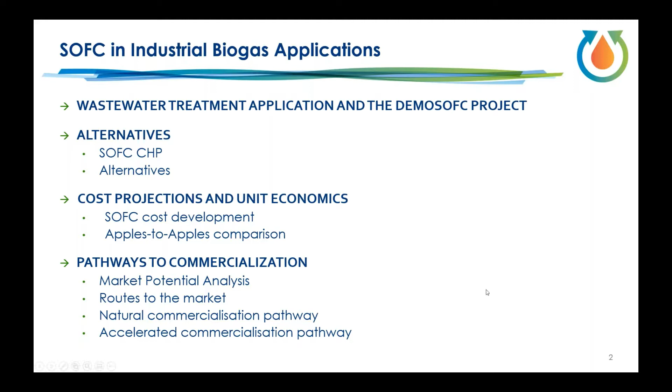Okay, a little bit of repetition. Some of you have been in these webinars earlier, some of you haven't. At the very heart of the DEMOSOFC project is the idea of energy autonomous or partly autonomous wastewater treatment, and how solid oxide fuel cell technology plays a role in this concept. Well, wastewater treatment first of all is a very universal application. It's surprisingly similar in every city. The basic processes are similar. There are some choices you can make, but the biggest difference is usually scale.

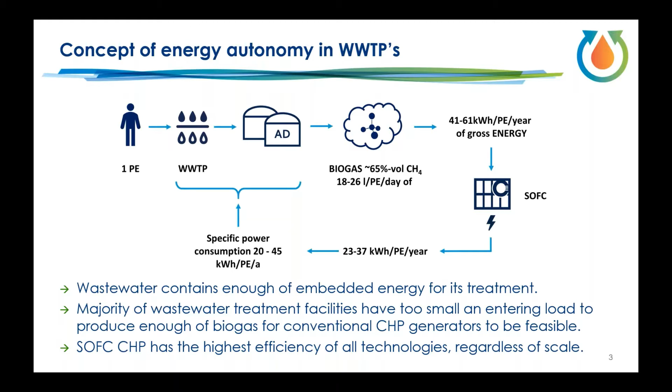Curiously, wastewater contains enough embedded energy for its own treatment. It's a fairly significant municipal energy consumer as of today, but it has potential of being energy neutral or even a net producer. The majority of wastewater treatment facilities are quite small, serving smallish communities, and therefore the entering load for biogas production is not sufficient to make power and heat production with conventional technology feasible, and therefore penetration of these technologies is quite low in small and medium scale. Solid oxide fuel cell technology has the highest efficiency of all technologies, regardless of scale, and therefore it has some interesting promise to this along with many other applications.

So this is, in very rough terms, the concept of DEMOSOFC. We have an existing medium-sized wastewater treatment facility with an entering load of approximately 180,000 population equivalent. There is an anaerobic digestion process that produces biogas out of the sewage sludge, and out of that gas we can produce electricity by solid oxide fuel cells. The facility also has a boiler that can supplement the thermal needs by burning either biogas or natural gas.

In a full embodiment of the concept, this fuel cell installation would have produced 174 kilowatt electrical power behind the meter. It would all be consumed by the facility and cover basically 100% of the normal thermal loads. The promise is superior efficiency and an ability to offset power that would otherwise get purchased from the grid. Fairly infrequent maintenance breaks and well-matched heat output with continuous thermal loads required by the digestion process, and on top of that, zero local emissions.

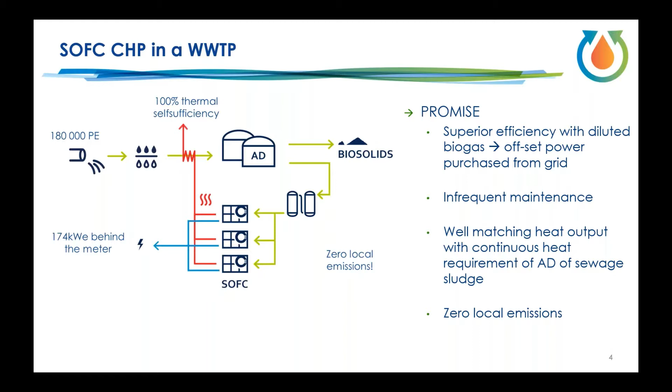If we consider this kind of facility and what can be done with that biogas, it's a medium-sized, approximately 80 normal cubic meters per hour biogas output, but there are annual variations. It's continuous. There's constant demand of power and heat, but variations in those loads around the year and around the day. In this area, energy overall is relatively costly, and particularly electricity, maybe higher than European average. And then, as mentioned, there's a boiler available for producing heat independent from other means of using that gas.

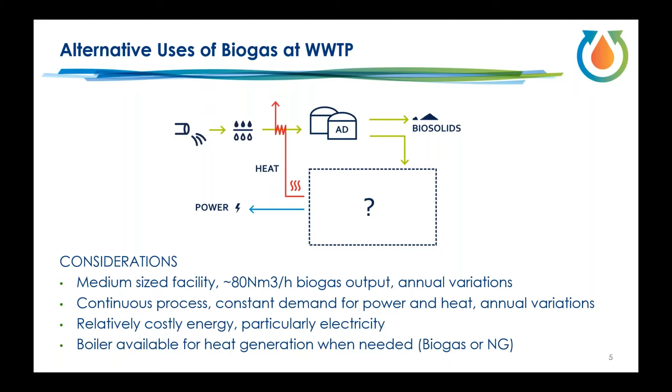The fuel cell installation, as illustrated on top, requires fairly stringent gas cleaning. It provides the highest electrical efficiency and sufficient thermal efficiency, but the investment required is clearly higher, particularly today, and it will remain higher than the engines for quite a while. And this is new technology. It has some concerns, of course, and sort of teething issues. The obvious and quite common solution would be a piston engine, or in some cases a microturbine. Both of them would have a lower electrical efficiency, more frequent maintenance, but this is very well-known technology and can be loaded dynamically.

For this application, it produces more than enough of heat, but electricity would be, out of the same amount of gas, would be lower.

Then an alternative that is not necessarily applicable in this scale is biomethane upgrading. In bigger plants, it's an obvious choice, and it is highly subsidized, a way of producing vehicle fuel. But typically, both the capex and opex make it attractive without particularly generous subsidies in megawatt scales.

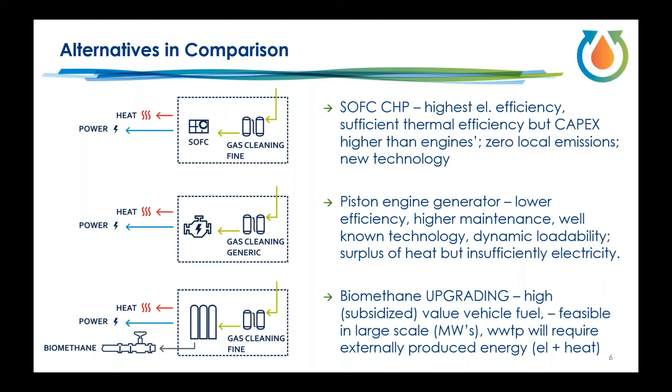Also, the facility itself, the wastewater treatment, which is the sort of primary function, requires both electrical and thermal energy, and then it would no longer be self-sufficient if all this gas would be used for other purposes.

It's a very kind of condensed slide about how to compare different technologies, like apples to apples. An internal combustion engine is the obvious choice. For example, in Germany, you see thousands of smallish biogas engines. There are plenty, and the variety of different sizes is plentiful. Taken from actually a German CHP genset database, I plotted an investment cost here.

Everyone can see that it's dependent on the power output, but it is very low compared to if you know anything about fuel cells. It's still quite low. Also, the efficiency on the right-hand side is dependent on the output.

And sort of intuitively you can already tell that the very low end is the least attractive area, where the relative specific investment cost is highest, and yet the efficiency is lowest, and the specific cost of maintenance also becomes higher at the low end, because it's basically the same cost of maintaining a bigger engine than a smaller one.

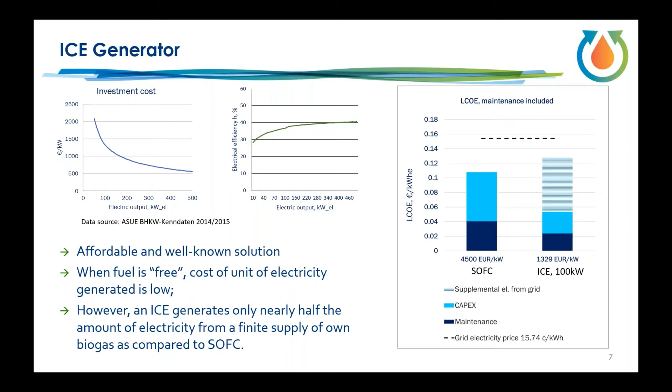Then how do we get to the 4,500 and further? Of course, we clearly foresee cost competitiveness with piston engines, microturbines, and this kind of conventional technologies. Unfortunately, at least for all the competitors sitting in the audience, I cannot share with you our internal stack or system cost data, but instead I wanted to show you data that I collected or put together from public sources.

On the right hand side is the fuel cell stack. In our case, in our power range and with our technology, the entire cost of a system is practically 50-50 fuel cell stacks and then the system. And the stack, therefore, is the costliest item in the system, and it dominates the cost in the future as well, and therefore it's very important.

The data is collected from several sources, actually, from Roland Berger's study. This was like an industry-wide questionnaire or query, where companies operating in this field would share their views of the future, including cost of stack. And I have just normalized it so that every stack cost is normalized per kilowatt net, independent of the system size or stack size.

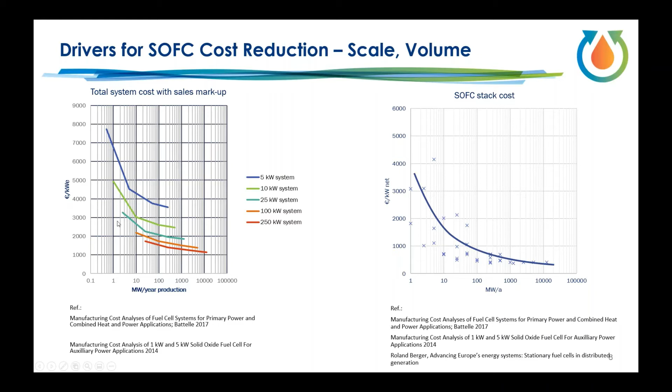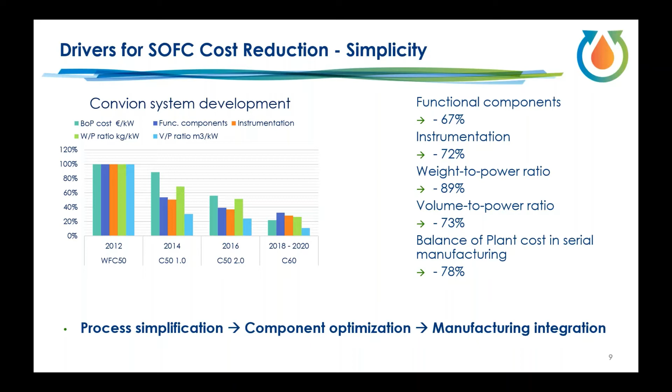I will now switch to Gbemi. She will discuss the pathways to commercialization and particularly look also at biogas and industrial biogas applications.

I think I will have to stop sharing, and I will start sharing. Okay, thanks, Thomas. I hope everyone can see my screen. Not yet. Yes. Do I have permission to share my screen? You have on the account where you are talking, but there are two. If you want, I can also allow the other. It's the other account, please, not the one I'm talking. Okay, yeah, perfect. Thank you. Okay, now you should be able. Yeah. Perfect. We can see the screen now. Okay, perfect. All right, so thanks everyone.

I will just continue, following on from what Thomas just presented. I'll be showing various pathways to commercialize the SOFC in European wastewater treatment plants. It's showing how we can get from today's high capital cost to a point where the SOFC is economically viable, that is cheaper than the business as usual way of providing energy on a plant, or cheaper than its competitor. And we'll see how business models, policies, and the market can take us there.

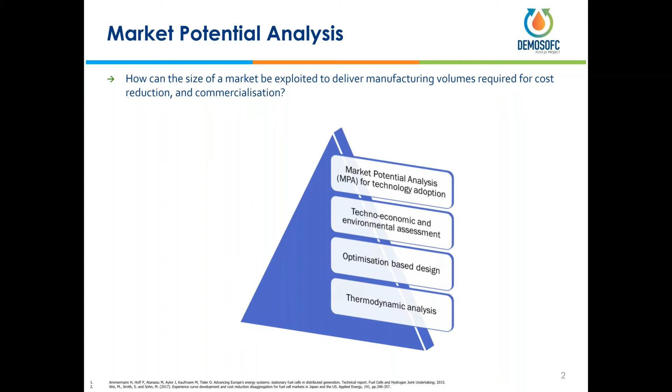For the DEMOSOFC case study, the market we're considering is wastewater treatment plants in Europe, where it's economically viable to install an anaerobic digester. We've identified about 6,000 plants where today you could possibly install the SOFC. Now, each of these plants in each of these member states will occupy a fraction of the market. Now, the market is not limited to this. The market could be a global market, but for DEMOSOFC, we're looking at European wastewater treatment plants.

An optimization-based design of each of these plants shows that the ideal demand for the SOFC is about 13,000 units. So the SOFC is of course not economically viable in any of these plants, but an ideal demand is that. So how can we exploit this ideal demand to bring about cost reduction? As you've seen in Thomas' slides, there is a relationship between increase in manufacturing volumes and the potential to reduce cost. And this is from learning by doing, from improving the manufacturing process. This data again was taken from public sources.

So if today the SOFC cost is about 16,000 euros per kilowatt, the objective of the market potential analysis is to show how we are going to exploit these 6,000 plants and the associated demand to create a manufacturing volume that can trigger cost reduction and sustain it until the point where the SOFC is economically viable. Now, based on this graph, we can come up with different categories of cost, from the very high cost today to the target cost sometime in the future.

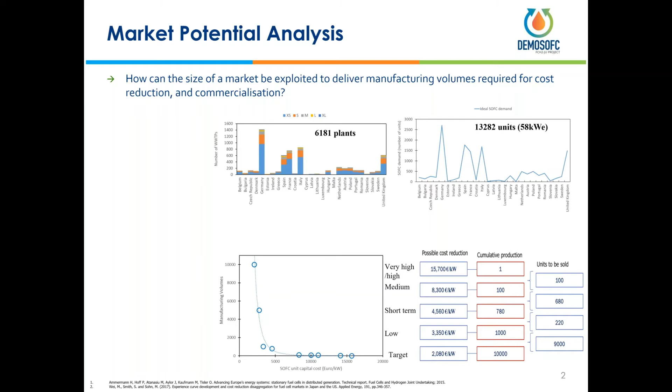So today, for example, if you sell 100 units, then you can get to about 8,300 cost reduction and so on and so forth. So what we see is basically we need to sell 10,000 units to get to the target cost reduction. So how can we exploit this demand of 13,000 units to create pathways to commercialize this technology? The demand is there, but the SOFC is not economically viable in all the plants. Therefore, we need aids or routes to the market.

There are various routes for a technology to get into the market. It could be market-driven, which is purely by energy prices, and for CHP technology, you're looking at the spark spread. A technology could also be driven by policy interventions. So the SOFC has been demonstrated. What we want are demand-pull policies, for example, the feed-in tariff, feed-in premium, tax mechanisms, and quota systems. Most of the plants we've identified in the first slide are eligible for some of these policies. What we want to see is the impact of these policies in commercializing the SOFC.

Another route to the market is business model innovation. This is particularly important for technologies that are cleaner, more efficient, but more expensive. The SOFC being more efficient than its competitor means that there are savings in operating costs every year, as we've seen in the DEMOSOFC plants. So how do we exploit these savings in operating costs to pay for the technology costs? This is changing the way the SOFC is purchased. So instead of paying upfront in year one, is it possible to spread the cost for the lifetime of the technology? And how does this increase its market share?

The next aspect is on incentivizing business models. Now, the common practice is to have policy interventions for technologies. So in the case of the FIT, the feed-in tariff, a price is given for electricity generated from clean energy vectors like biogas. What if we have policy interventions to encourage business model innovation? So for example, if a particular plant agrees to plow back all the operational savings from using this technology for its lifetime, then it should be eligible to receive some form of tariff from the government.

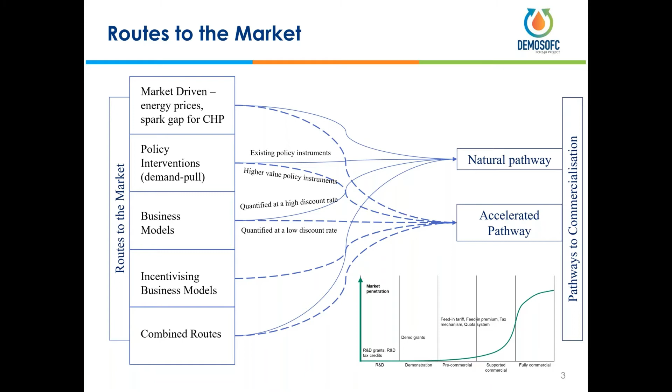Now, what does an output of the market potential analysis look like? We've got these routes to the market, which could be market driven or incentives or business models. We want to show how increasing the market share, the adoption of the SOFC in the market, can bring about a reduction in its capital cost by exploiting the size of the market. So this graph was from the first slide, the ideal SOFC demand in the wastewater treatment plants we considered.

So specifically, we want to say, what is the impact of incentives in creating a market share today? So if, for example, incentives are implemented in some of these plants, it's possible that out of the 6,000 plants, 4 plants are economically viable. Therefore, the market share will be about 4 divided by total number of plants. Then how much demand can we generate today by implementing the incentives, and how does that result in cost reduction up until the point where the SOFC is driven without any interventions? At that point, we say the technology is economically viable.

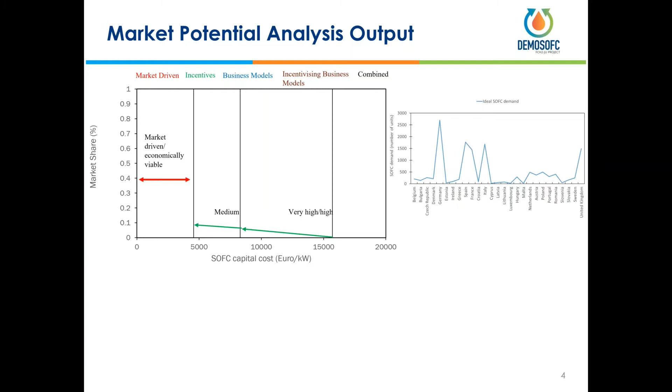Now, the good thing is a promising technology only needs to occupy a fraction of the market. Our goal is not 100% of the market. The end goal is just a market share to ensure that the technology is driven purely by market forces. Again, the goal is not 100% market share, but just a market share that can trigger and sustain cost reduction up until the point where the SOFC is economically viable.

The challenge with the natural pathway is, even though it triggers the cost reduction from the very high cost today to some 38%, it cannot sustain cost reduction until the SOFC is driven by market forces. Our analysis shows that the SOFC is driven by market forces if you can reduce the cost to about 4,500 euro per kilowatt, which is again very similar to Thomas' analysis.

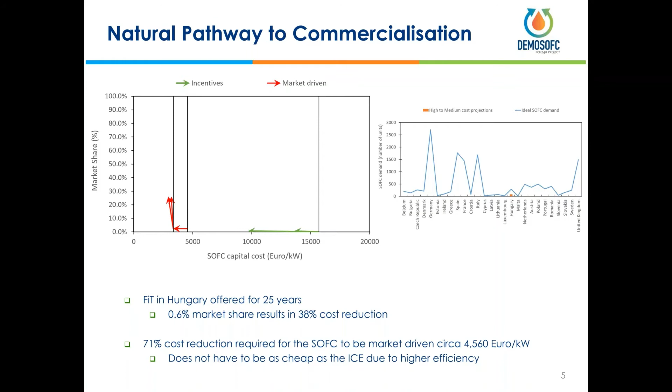So how do we get from this point to this point today? So the natural pathway, of course, cannot take us there. Incentives today in all European countries can only give us 38% cost reduction. Again, this is good for the technology. This is also good for the manufacturer. But ideally, we want to be able to trigger cost reduction and sustain it.